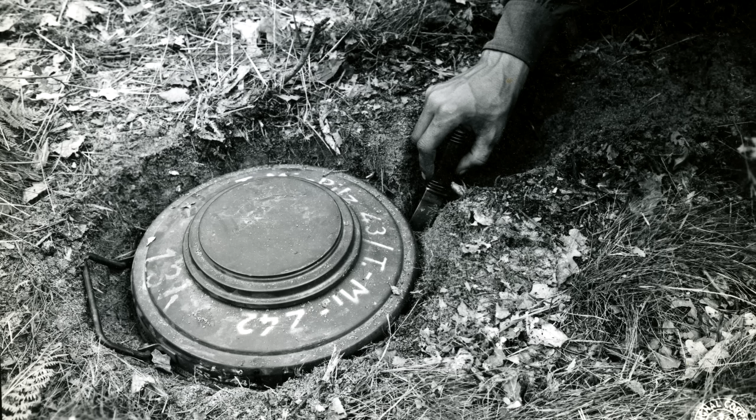With their combination of effectiveness and low cost, it's no surprise that minefields have been and continue to be a powerful defensive tool. The ability to limit travel for forces on land and sea both lowers the military presence needed for a given position and greatly impacts enemy forces.

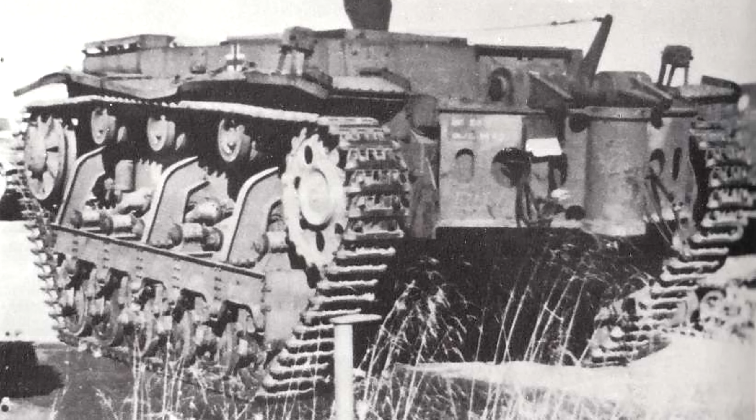This is the same when it comes to tanks and other armored vehicles, which can easily be damaged or destroyed by these hidden explosives. With such a deadly threat, it's obvious that a safe and effective means of dealing with minefields is important for any military. Recently, we looked at a failed German design which was built using a Panzer III chassis, but in today's video we will look at something even more absurd, this time by the Brits.

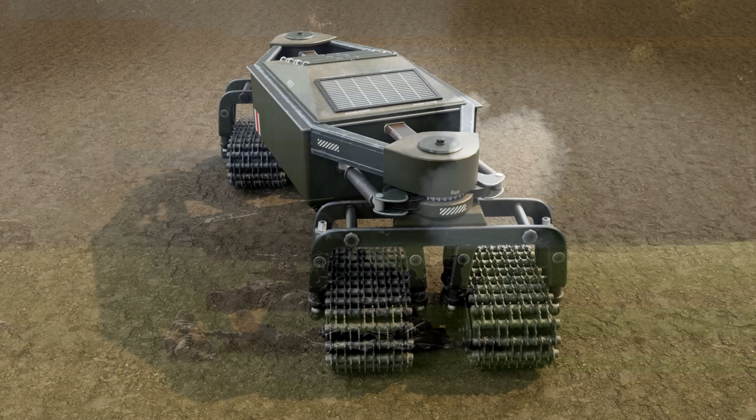Now let's get into the topic of this video. As I mentioned in the intro, the concept of a minesweeping vehicle was by no means a new one. Many designs utilized rollers or flails, with some examples including the Sherman Crab and the more modern Minenraumpanzer Keiler. Although these sorts of devices have seen production, other, more complex designs were considered throughout history.

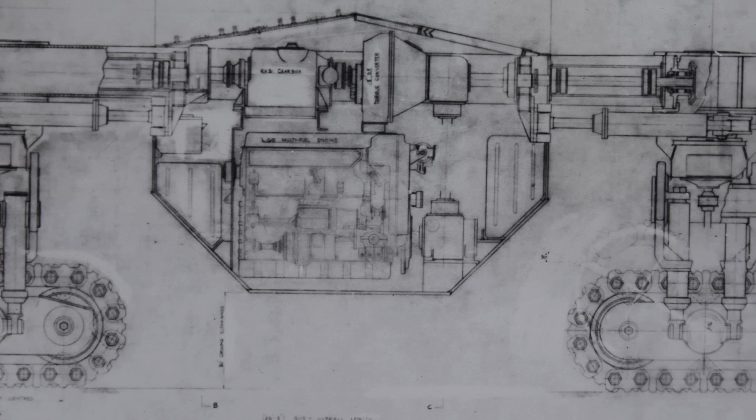The two which most closely resemble the vehicle we will look at today were created by Germany during World War II. These are the Alket-Versuchskraftfahrzeug 617 Minenraumer and the Krupp Minenraumer S. We will definitely cover these in videos of their own, but the concept for a dedicated mine-clearing vehicle which could essentially shrug off the blasts with minimal damage did not die with the Third Reich.

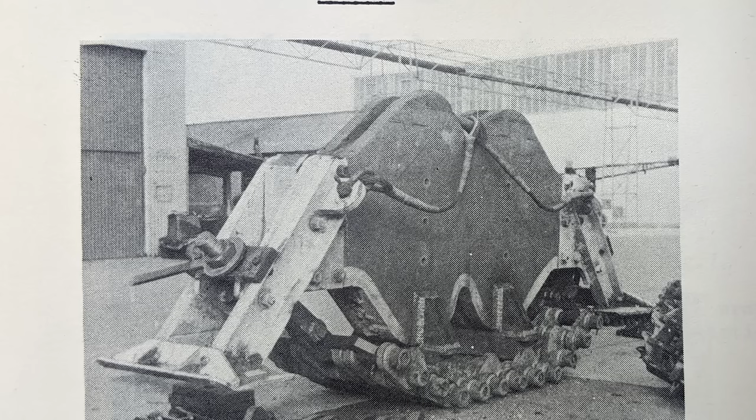At this time, an exact date for the start of the anti-tank mine clearance vehicle, later known as the mine-resistant vehicle, is not known, but it seems to originate sometime in the mid to late 50s. The information we have about it ranges from late 1959 through to 1967, so some information about the early history is still unknown. Regardless of that, we have more than enough to cover the design of the vehicle.

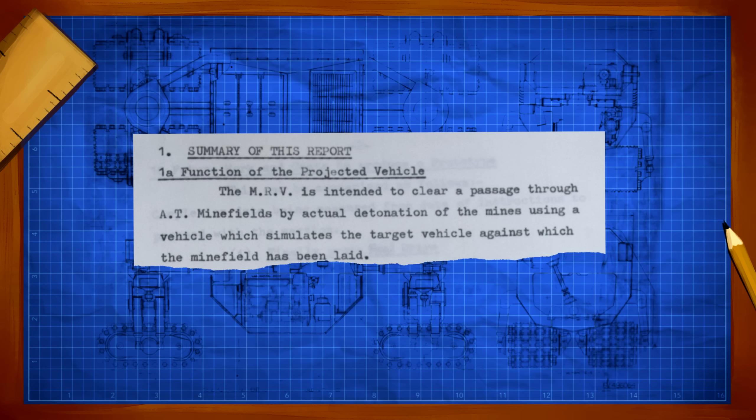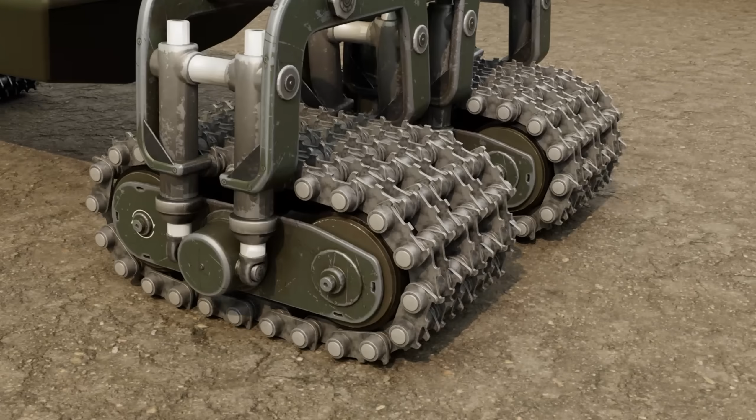As I mentioned in the intro, the idea of this vehicle was to allow safe passage of minefields. The exact description is found in a report on the project dated January 1968 and reads as follows. The M.R.V. is intended to clear a passage through anti-tank minefields by actual detonation of the mines using a vehicle which simulates the target vehicle against which the minefield has been laid. This is basically a long way of saying it was meant to drive through a minefield and detonate any mines in its path.

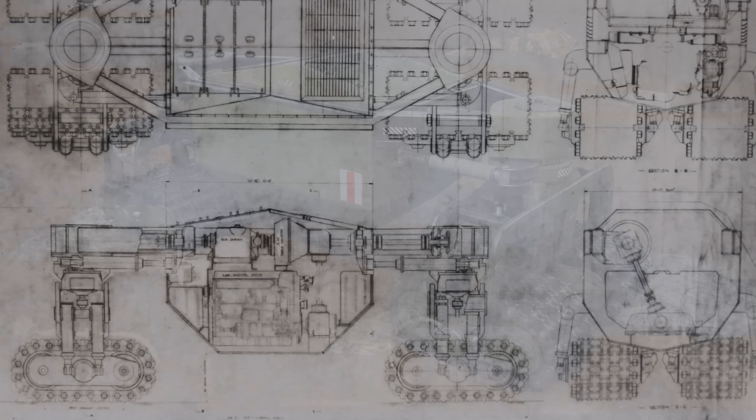Shown here, the initial concept for the M.R.V. would use a 4-track layout with a central hexagon-shaped hull roughly the size of a Centurion. The power plant would be contained within that central hull, keeping it safer from blasts. Though more refined, the later designs would still share this overall layout with a more square shape. Interestingly, the layout of this vehicle somewhat reminds me of the Frank Tinsley design called the Baby Assault Tank, which I covered in a previous video. There is definitely no connection there, with the Tinsley design being fairly absurd, but the similarities are certainly noticeable.

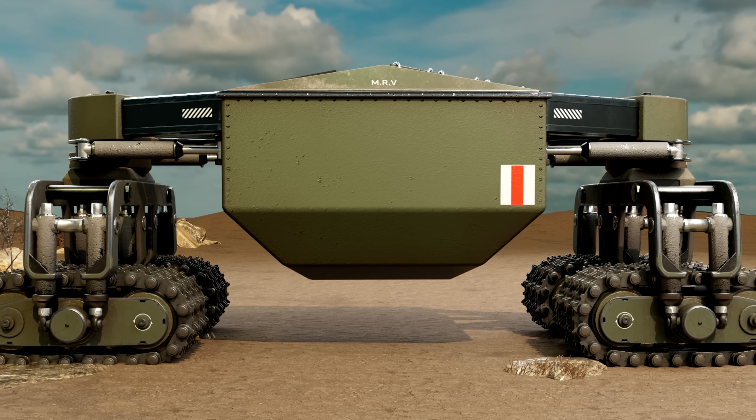Estimates put the M.R.V. at approximately 47.3 tons with a length of 25 feet 8 inches, 9 feet 8 inches tall, and 10 feet 10 inches wide. This gave the vehicle a power-to-weight ratio of roughly 13.3 brake horsepower per ton and a maximum road speed of a blistering 16 miles per hour. Looking at the design, you may be asking where the crew is intended to sit. Unlike tank-based minesweepers, this vehicle was planned to be entirely remote-controlled, all but eliminating the risk to personnel.

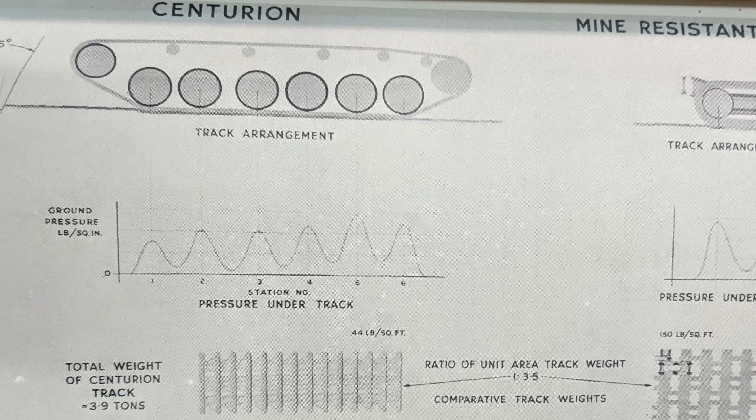Probably the most interesting aspect of this design was how it was planned to cross the mine-laden ground. Rather than driving in a straight line like a typical armored vehicle, the M.R.V. was going to do a sort of crab walk. Initially, we see that the two rear tracks were considered to be placed closer together, but the later schemes show it offsetting the front and rear set of tracks. This was referred to as crabbed and would ensure the M.R.V. didn't leave any mines in between its tracks. It also slightly increased the area it could cover from 10 feet 10 inches to 11 feet 4.5 inches.

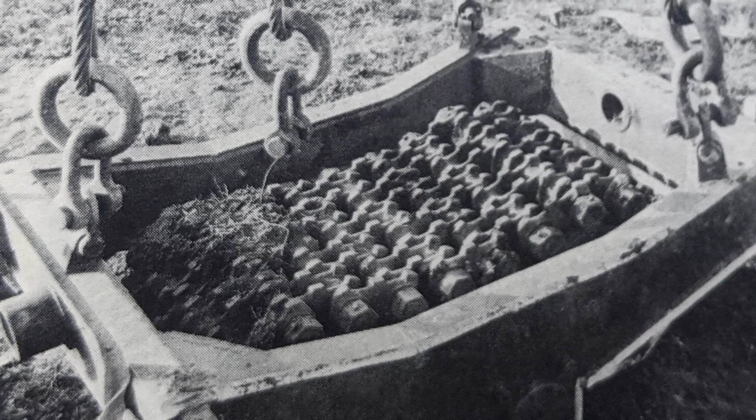These tracks would be driven by an electric motor fed power by a Leyland L60 multi-fuel engine with an auxiliary engine for battery charging and for the hydraulic steering pumps. Initially, this project was led by the Fighting Vehicles Research and Development Establishment, or FVRDE. They would create an unpowered rolling test rig to simulate the vehicle's suspension, which was tested both against mine blasts and moving tests at 8 miles per hour.

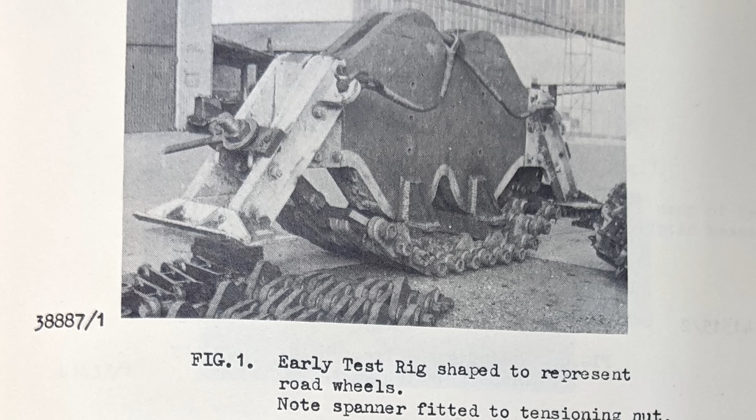This test rig, as well as an earlier rig which simulated the shape of road wheels, were completed prior to December of 1959 with 5 reported test detonations. What may be the earliest photo of the original rig shows it mounted to a Tortoise tank destroyer. This is most likely one of the last 2 Tortoises, P5 or P6, with Ed believing it to be P5 Adventurer, which was in the BAOR.

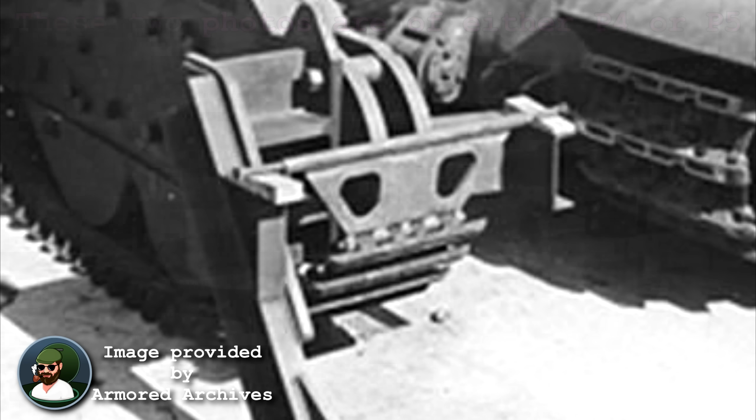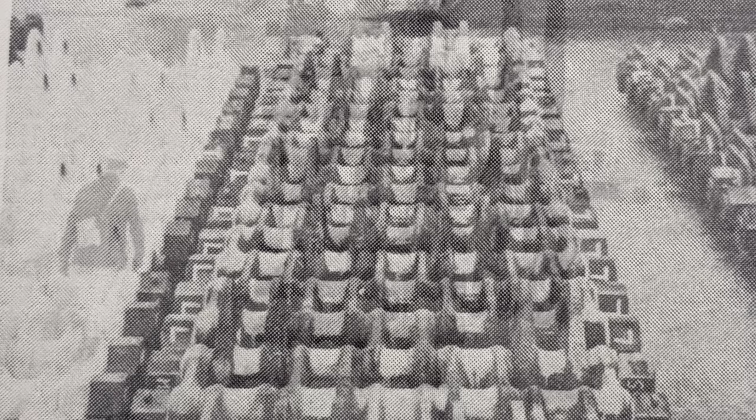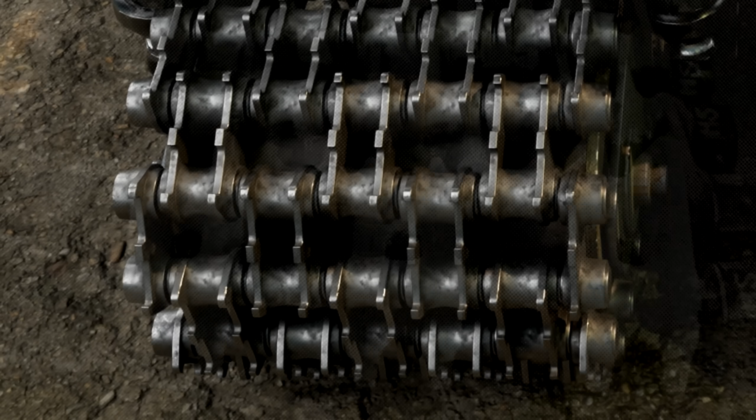The tracks appear quite different from the later ones, so this makes me think it was an earlier form of the project. By October 1960, the track design had changed to a less traditional layout made up of cast links. These links were shaped to allow the blast to pass upward through them with minimal resistance, and the elliptical shape was chosen to prevent the track from being broken through force exerted sideways. Although not an exact comparison, this layout was sort of like linking several bike chains together on a massive scale.

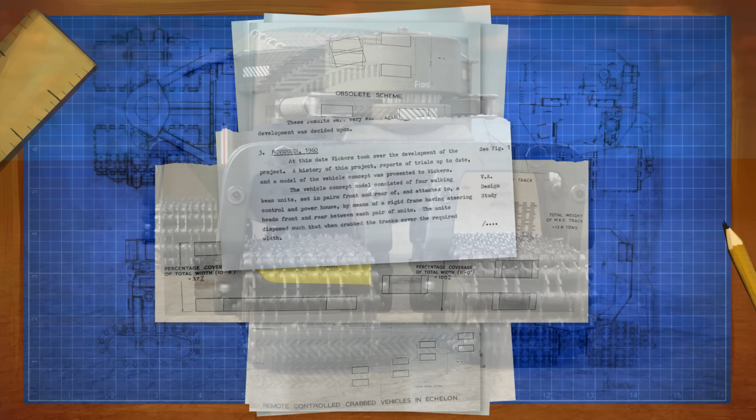In November of 1960, the project would then be passed to Vickers, who would take over the development from there. At this point, the design had essentially reached the final layout, with the front and rear set of tracks being attached to the main body with 4 walking beams. Assuming the proposal here is the same as they refer to, these form a pair of triangular arms which then connect to the drives as well as supplying power to them.

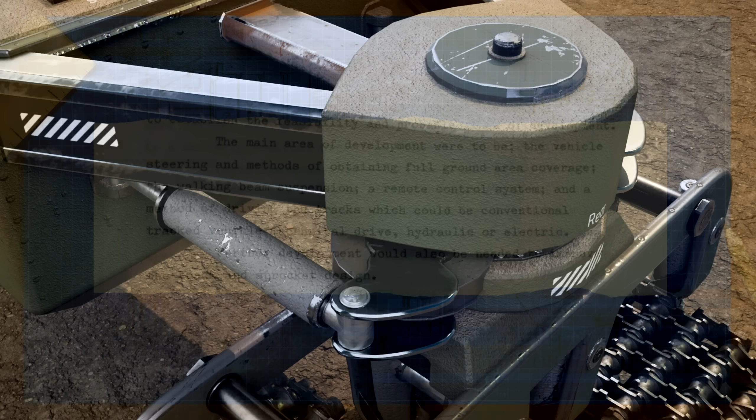Upon receiving this project, Vickers would focus their efforts on the following. The main area for developments were to be the vehicle steering and methods for full ground coverage, the walking beam suspension, a remote control system, and a method for driving the tracks, which could be a conventional tracked vehicle mechanical drive, hydraulic, or electric. From this, we can tell that at this stage, the project was still in its infancy, with much work still to be done.

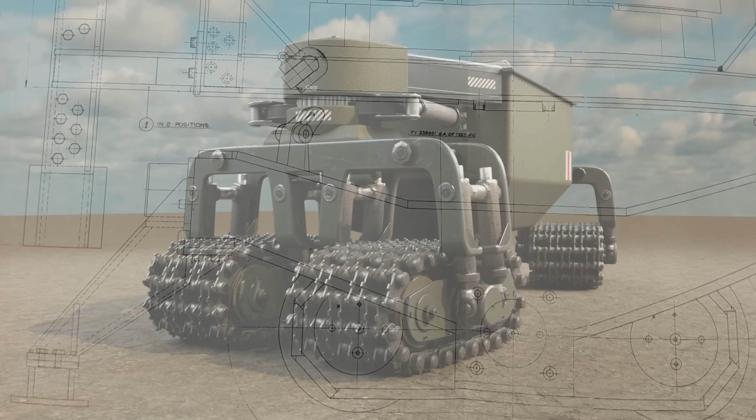The following year, after more progress had been made, a few more proposals were made, including development of individual track drives and suggestions for a human driver rather than remote control, among others. At this point, consideration for live fire trials began, with preparations continuing into 1963. The preparations included development of the test rig as well as receiving a Conqueror to mount the rig to. Trials would then begin from June to December of that year on individual sprockets to test the materials and design strengths or weaknesses.

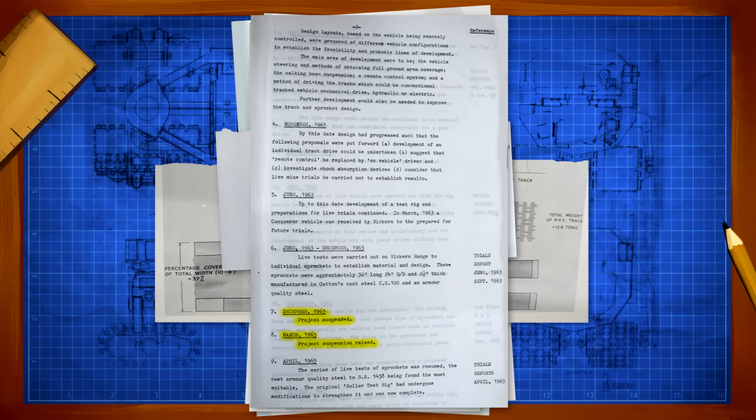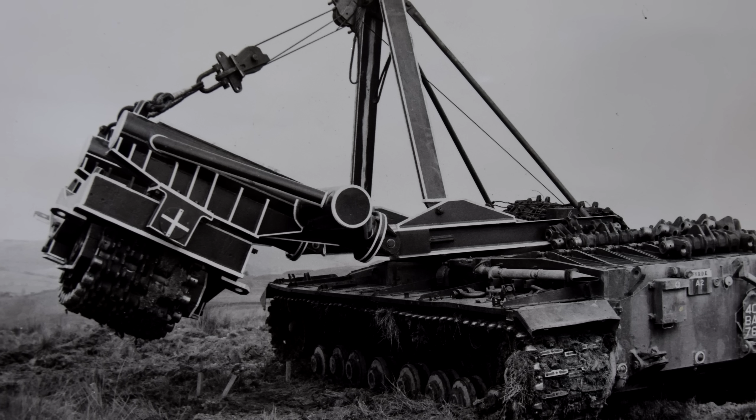Following the completion of these trials, the entire project was suspended for the better part of 2 years before work resumed in March 1965. By April, the live fire tests resumed, and after the information gleaned from them was used to strengthen the original roller rig, the test rig was now complete. Tests of the now complete test rig fitted to the modified Conqueror hull began in May, and by September of 1965, it was decided to now manufacture a fully powered test rig.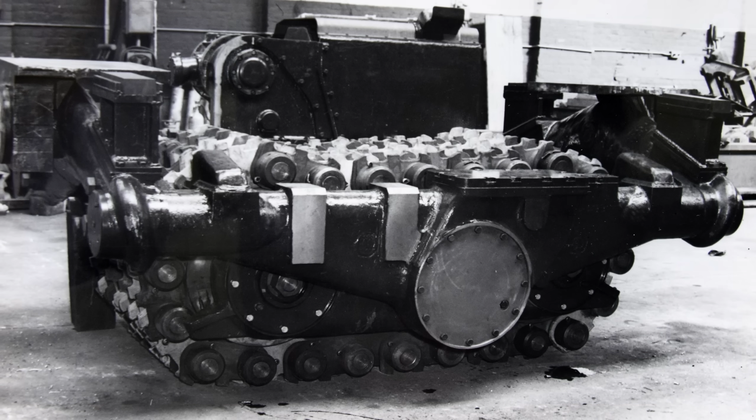Tests continued with the non-powered rig for several years, still using the Conqueror hull, with different components as the data from previous tests was used to make improvements. Finally, in September of 1967, the powered mobile rig was complete, and the first live range test was conducted in October. As should be expected, this test revealed design flaws, with the 20-pound HE charge fracturing a cast part of the walking beam frame.

The sprocket and track survived, however, proving, quote, "The single test, although not sufficient proof in itself, gives confidence that further development along these lines will evolve a suitable walking beam unit, a major step to development of a prototype vehicle." Unfortunately, the damage caused by the blast meant that further tests could not be carried out.

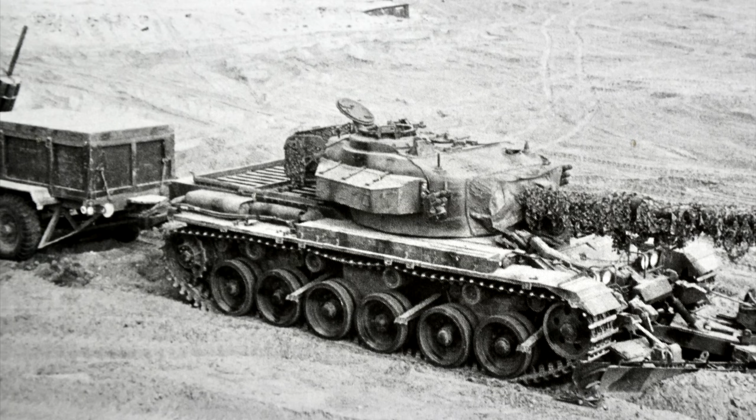The concept itself was certainly sound, and other nations did consider similar methods for dealing with minefields, but considering none of these have entered production, it is relatively clear that the costs outweigh the potential benefits. What do you think of this lumbering juggernaut? Was it a design not given the funding it deserved, or was it yet another engineering dead end which became a Cold War money pit?